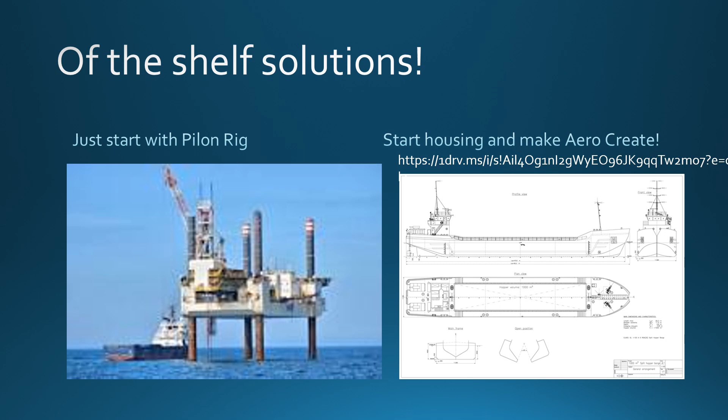Now, I have been thinking about a plan, and recently watching two different TV shows and movies. You could just go with this plant here, and it alone would be wave resistant and easily generate enough hydropower to power your entire plan. I would, of course, modify this and not have the center here open; this would be rain collection or mist collection facilities,

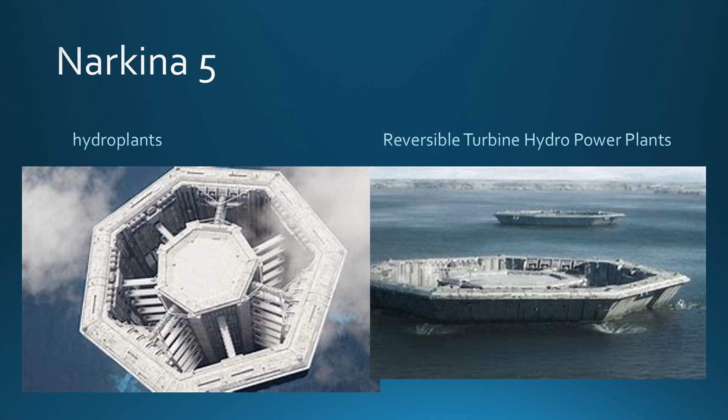and would be sealed so that the air was not escaping, and you could be using it as a reversible turbine during the sunlight hours. This would all be solar panels. So, easily with 30 million, you could purchase one right here off of this website.

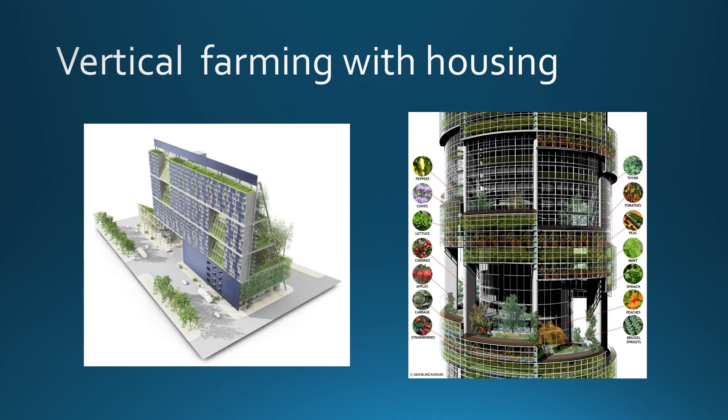But that on its own would not be, you're like, what are the engineering issues? Well, if you combine vertical farming with housing, then all of your problems of being out on the ocean are all solved. And you're like, well, could you build a concrete block that could support this many people? And just combining the building from Andor and this, you then have fully self-sufficient gardens, aquaculture, and sunlight that would support many thousand people.

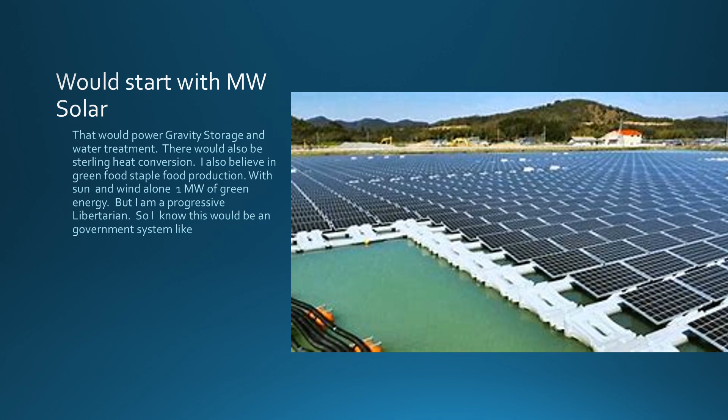Now, you're like, aircrete? If you've just watched some YouTube videos and Googled it, it would just fall apart. But if you just simply put some marine high-density panels, this stuff is nearly indestructible to salt water. That's your big problem, I guess, maybe you were saying that salt water destroys things, but this high-density polyethylene cannot be damaged by wind waves.

Now, maybe a hurricane force wind and bad engineering design could tear a panel off. But with wind resistant construction and concrete underlayment, and then reinforced concrete, the structure would be wave, wind, and hurricane proof.

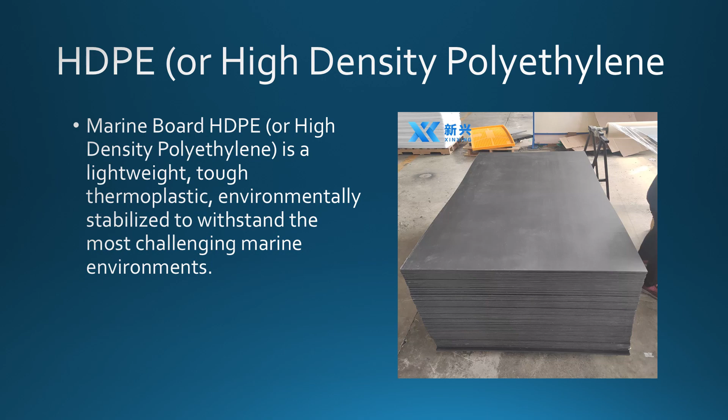So what is aircrete? Now, there are many different chemical compositions. And we would start maybe just by buying blocks like this that would come preloaded on one of the barges. We would buy a barge, a concrete barge, that one would be the construction thing and one could just come loaded. One loaded up with the crane and supplies, and one loaded up with all the supplies to make aircrete and starters for all of the aquaculture.

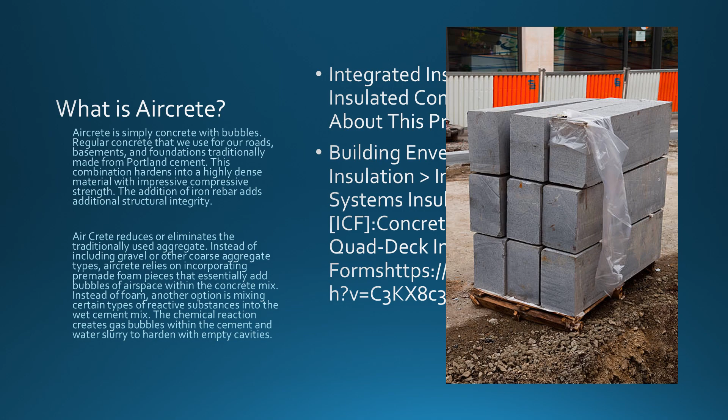Now, of course, to be self-sufficient, we wouldn't have to, but I would recommend vertical agriculture, where one layer provides the nutrients for the next. Now, my system, of course, would be much more food web based as opposed to just providing the different nutrients for humans. So I wouldn't start with a high population of people, I would start with a workforce, and it's more of a societal problem than an engineering issue.

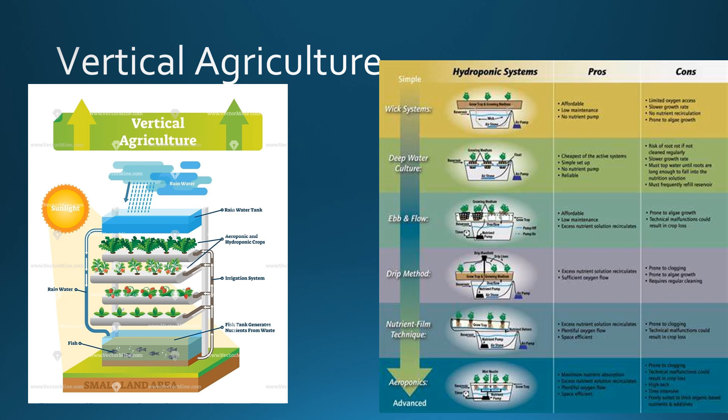You could just buy an off the shelf vertical agricultural system. You could purchase it assembled, where a crew would just come out and build the whole thing for you. But I would add this mini layered approach with a deep water culture. So you would start by converting. I would go half and half. Just take the seawater and start. You could just start by sterilizing it and adding the cultures you would want.

So I would divide it 3 ways. One, just pump it out and see what naturally grows. Just provide sunlight, and because my specialty is water testing, I would be able to tell you what nutrients you're missing.

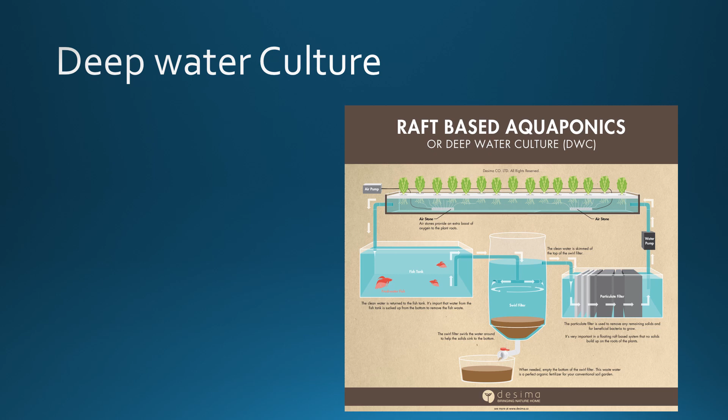So you just build this vertical system where you have salt water and fresh water mixing, with species like Nile tilapia and brine shrimp. You can actually grow life in the brine that you're producing and use that to feed your fry. And as this system works through, the waste products are all being removed naturally.

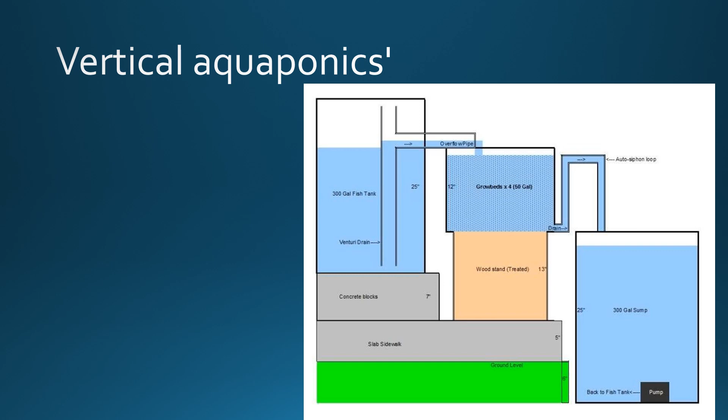Now, one of the big problems with wave power, which I mentioned in the other video, using a hydro system, is that typically you need a very high head height, and the 11 meters that you could get with a wave just isn't going to provide enough head. Though, if you put a column of water all the way down to the seafloor and use the 100 meters of seawater as your driving force, or put this on the edge of the continental shelf, you have 1,000 meters of head.

You could go even deeper, and at that point the head becomes so much that you would need to pressurize the vessel so that it is not being crushed. Not really pressurized, but put it in a concrete block or something.

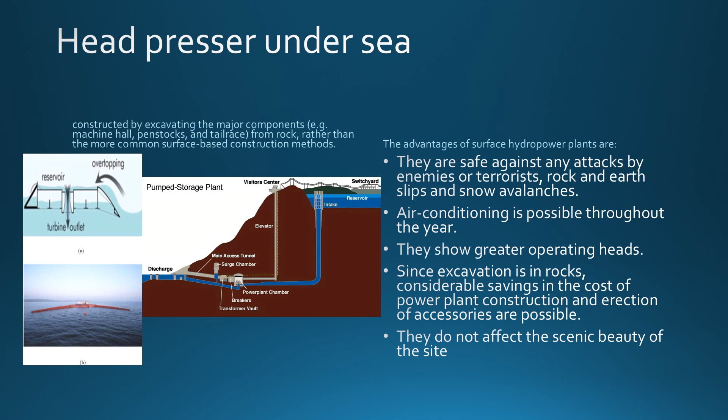Now, like I said, you could just buy this simple pipe and put it on the seafloor. So you're filtering the seawater slightly so that logs and large particulates are not going in your centrifugal pumps that are providing energy during the day, and some would provide energy 24 hours a day. And because the ocean is very cold and the surface is going to get very hot, with the solar panels and all, through thermal neutrality you are going to be able to balance out the system just because you have cold salt water.

Now, I would use these 3 carbon negative building components. Marine grade plywood would be the natural choice, but I would only use that rarely, or if you wanted to build something cheaply. I would start with one-trip shipping containers. These are basically junk. You can buy these for pennies on the dollar and then just coat them with these sheets and they become seawater proof. Now, it's not that simple, but by just buying these 2 components, you've converted a shipping container, which is just going to be rotting out in the desert somewhere, into an airtight, seawater tight shelter.

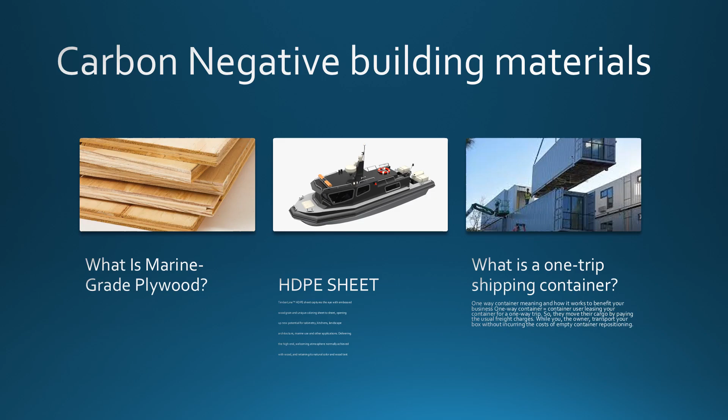So there are no engineering problems, but there are tons of societal and cultural problems with setting up a seasteading community. If there's interest, I will cover what the real problems are.